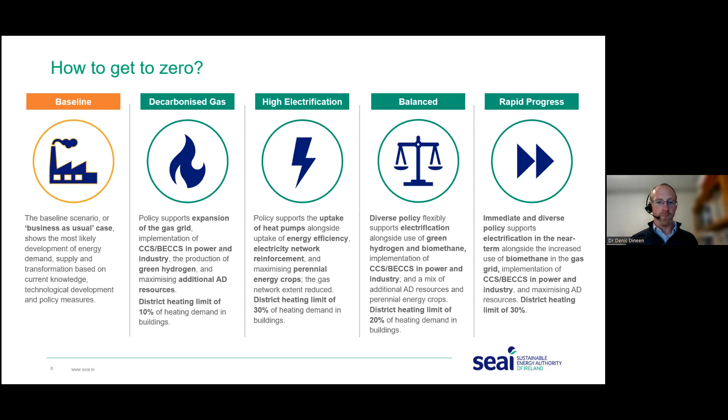So we'll look now at some of the key insights of the report. The first, and really this is just context rather than a finding of the modeling as such, is that we're not starting from a good place. Heat is responsible for a quarter of all greenhouse gas emissions - so it's not just energy, that's including agriculture - and it's just under 40% of energy-related CO2 emissions. As Barry mentioned at the start, it's a really big chunk of the overall piece.

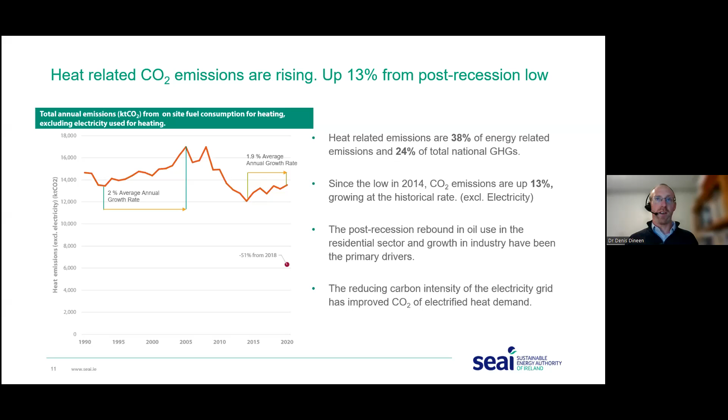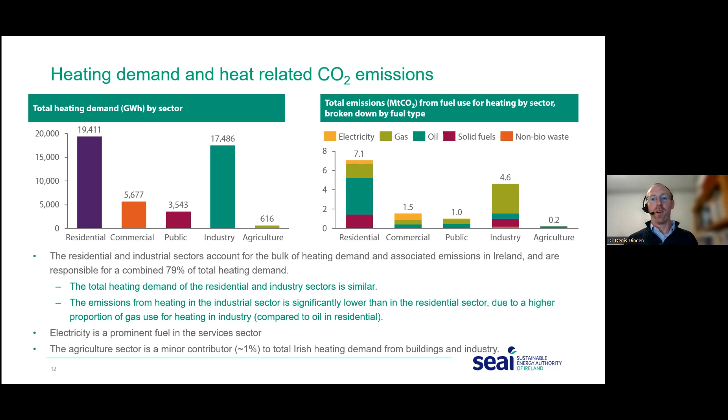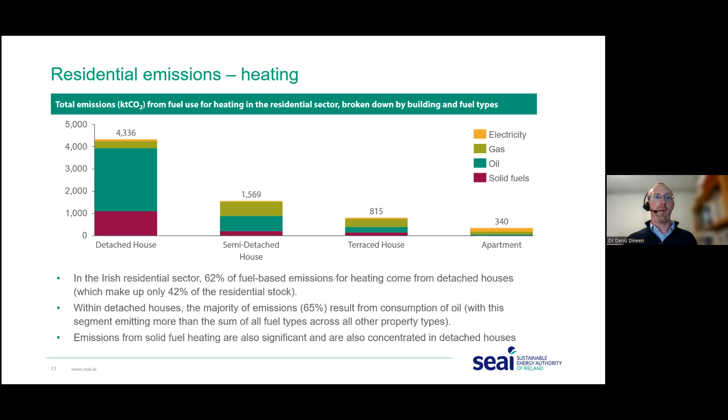But most of the other sectors, apart from those two, it's really kind of medium or low grade heat. Now, I suppose it's a relative term because, as I say, we would call our kind of high-medium grade heat there 150 to 500 degrees C. So a lot of industries in Ireland would consider 500 degrees C to be high temperature. But I guess on the international scale, when you have industries like steel production, it's generally over 500 that's called high grade heat in that context. So I guess it's a bit relative.

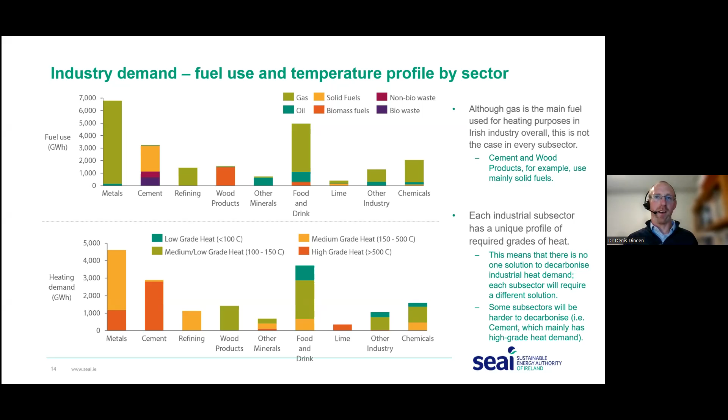run on solid fuels. So when we were looking at modeling the industrial sector, it was actually by these technology types that we characterized it rather than by sector or anything else, because it's these individual technologies, boilers, furnaces, that we need to look at for the direct, possible low carbon alternative replacements.

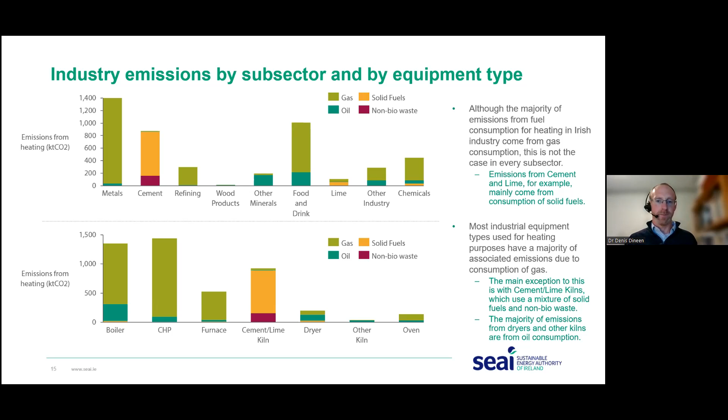Again, more kind of context. There's been more light shed on this in the meantime since the study, but still the overall goal is that Ireland aims to reduce its emissions by 51% from 2018 levels by 2030. So this is for all emissions, including agriculture. So energy will have a greater burden.

Now, there has been more detail provided since then on the actual sector emission ceilings, but I haven't updated these slides with those yet. But the statement still stands true that energy and heat will have to play a larger role than the level 51%. So there's no specific target for heat in the climate action plan. It kind of cuts across a number of different sectors, but

one of the findings of the report really is that, yes, the climate action plan targets that relate to heat will be very, very hard to achieve, and they're very ambitious, but even if we were to achieve them, that is unlikely to be enough for heat to meet a pro rata share of the required emissions cuts.

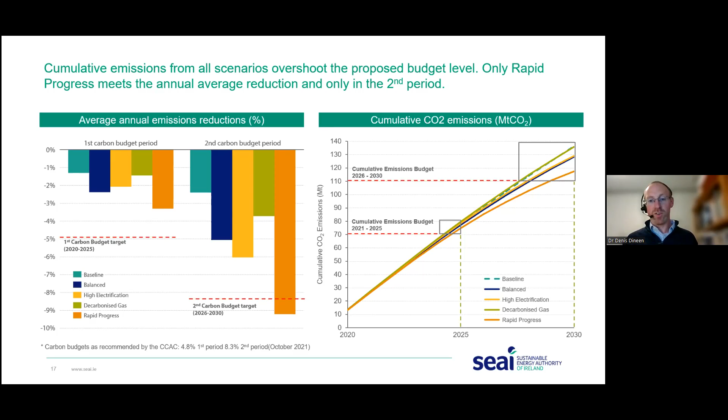So even then, the rapid progress scenario only comes within budget in the second budget period, and it still misses the cumulative 2030 target across the first 2 budget periods. So really, the finding there is that the modeling shows that an unprecedented level of additional policy effort that goes beyond the current heat-related targets in the CAP 21 is required if heat is to play a proportional share in meeting the carbon budget limits.

So the main focus of this study was, as I said, to explore key pathway options to get to net zero by 2050. So the scenarios with the lowest overall cumulative emissions, we found, are the ones that make use of the technologies that are commercially available today. So that's technologies like electrification and district heating.

And then the scenarios that wait for potentially promising technologies in the future, like maybe hydrogen, have higher cumulative emissions because effectively you have to wait longer to lower your emissions until those technologies become more mature. And again, that's the key finding of the report. And the reason is simple: the scenarios that rely on electrification decarbonize faster because those electrification technologies are available now.

And as I said, the decarbonized gas scenario, yes, it relies on biomethane in the short term, but there's a limited resource potential there of biomethane. So really it has to wait until hydrogen comes in at scale to allow more complete decarbonization of the heat system. And that requires waiting until the 2030s to decarbonize a large chunk of the system. And so that necessitates larger cumulative emissions.

Of course, the rapid progress scenario, the way it was designed, sees the lowest cumulative emissions of all the scenarios. And this, again, highlights the benefit of early action. But again, just to say that what we included in the rapid progress scenario was really unprecedented levels of policy effort.

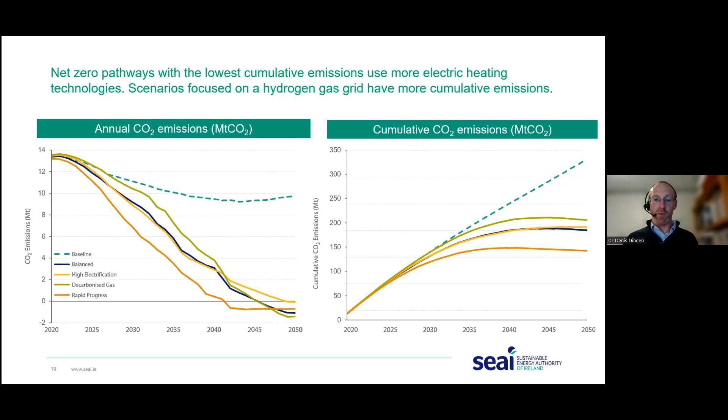So the study identified a set of key actions that we recommended that policymakers can act on now to deliver emissions cuts. So in this section, we'll go through some of those and outline the evidence that we found to support them.

So the first finding that we had was that district heating offers significant additional potential, that it's a proven mature technology and that it's available now. So again, this is speaking to the necessity to really leverage and lean on the technologies that are available now as much as is possible. So we invested a lot of effort in just understanding the potential of district heating, and we find significant additional potential compared to previous estimates.

And this was down to a more detailed analysis of how the costs of rolling out district heating scale with heat density. So previous work carried out by ourselves would have indicated that district heating networks weren't really viable unless the heat density exceeded 10,000 megawatt hours per kilometer. But in this work, we were able to show that actually the capex of district heating begins to plateau once heat density exceeds even 1,000 megawatt hours per kilometer. And there's a big difference between those two.

So above that 10,000 megawatt hour per kilometer threshold is only 2.5% of all small areas. But above the 1,000 is something close to 50% of all small areas, or 50% of all building heat demand also. So there's a really big difference, and that's really the main reason for this finding that district heating could potentially play a much larger role than was previously thought.

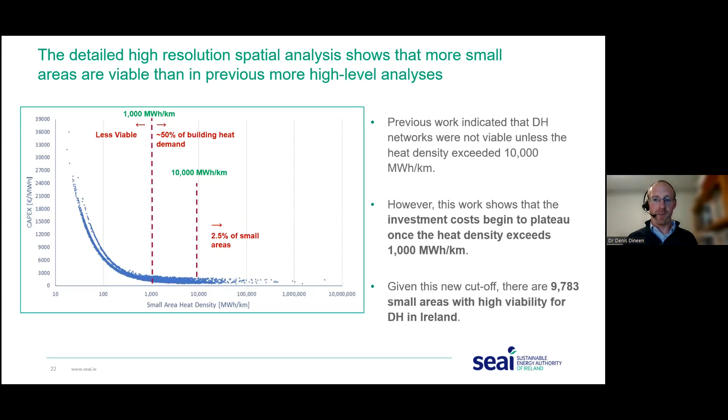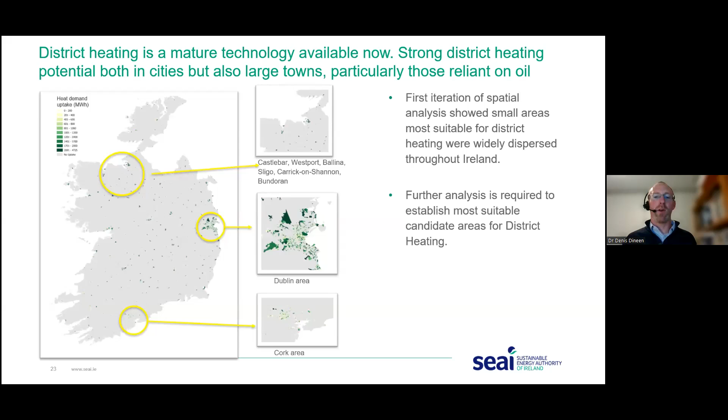So this map illustrates the results of the modeling at the time of the publication of the heat study. So you could say it was sort of a first iteration of a spatial analysis. And what it showed was that the small areas that were most suitable for district heating were really widely dispersed throughout Ireland. But we were clear from the start that further, more detailed analysis is required to establish the most suitable candidate areas for district heating.

And we've already made a start on some of that more detailed spatial analysis since the publication of the heat study. So we haven't published it yet, but you can see here just a screenshot of the type of outputs of the work we've been looking at. So the chart here shows the heat density for commercial and public sector heat demand for Louth. And looking at those sectors reflects the importance that these sectors have to act as anchor loads for prospective district heating schemes.

So even this is still a high level analysis really, and it's intended that this work will lead to identification of more areas for more detailed site specific feasibility studies that will really start pointing to the actual feasibility of this range of locations for rolling out district heating to hit our ambitious district heating targets.

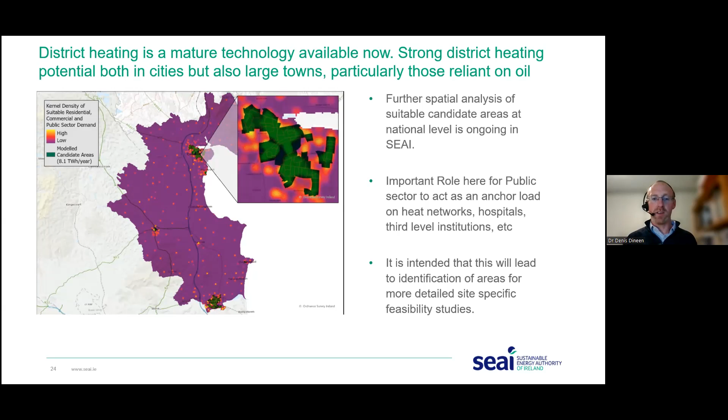So looking at what energy sources were used in the model for district heat, in all scenarios, we see a prominent role for both air source and ground source heat pumps, and also potential for biomass. Now, there's a couple of caveats to say here, I guess. We were conservative in our approach to heat sources, and we definitely had some data limitations, particularly in relation to waste heat. So we would expect that with better data, we would see more waste heat coming into the model, but it was a limitation on the modeling there really.

So we were keen to emphasize that there is, as I say, more potential for low cost heat sources that were outside of the scope of the study also. For instance, any potential new power stations should be made ready for heat extraction that could potentially feed into district heating systems. And also outside of the scope, because there just wasn't sufficient data at the time of the study, was the potential for deep geothermal heat sources. And the GSI are investigating and doing background work now that's showing that there could be large potential for geothermal for heating and heat storage.

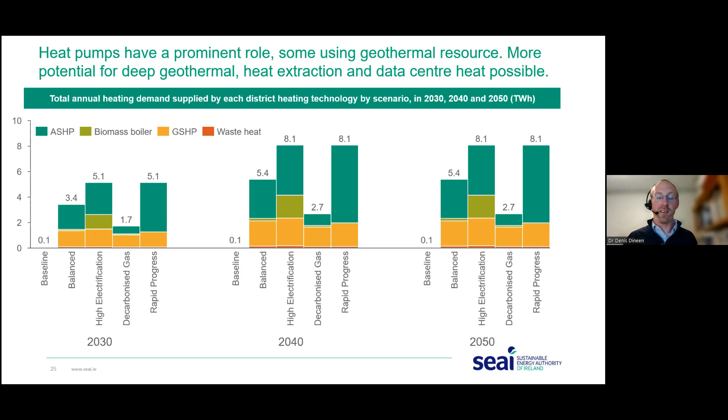So I guess probably the bigger question is, why do we not already have district heating? Many countries across Europe do, and it's a very mature and very successful technology. So it's clear there's not technological barriers. Really, the barriers there are in terms of regulatory, planning, financing.

So since the publication of the study, a number of multi-department, multi-agency working groups were established, and they're looking to identify the necessary steps and the likely barriers to rolling out district heating and to propose solutions to those. So those working groups are currently working on that.

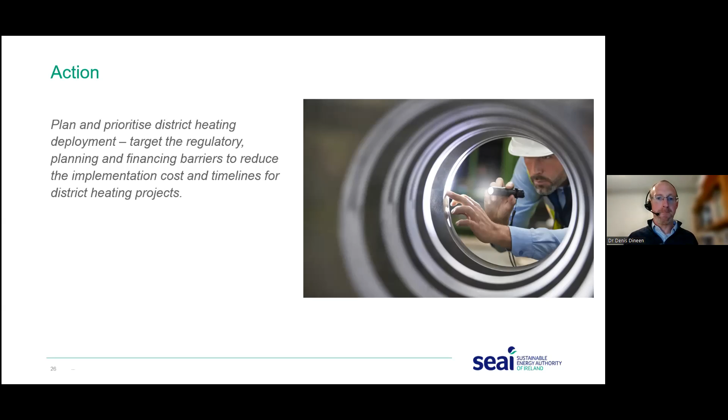So another finding of the study was that heat pumps are a very important technology in all scenarios and in all sectors. And they are technically suitable for many building types and even for some industrial processes. So the modeling that we did on this considered a range of factors relevant to their deployment, such as the least cost combination of fabric upgrades to allow the efficient operation of heat pumps, the impact on the electricity network of all the extra electricity demand from large scale electrification of heat demand, and also the performance and the sizing of heat pumps in some more poorly insulated buildings.

So the graph here shows the different scenarios that we ran and the heat pump penetration across time period. And really the main point is that they're prominent in all the scenarios. We can see that they mostly come through in the residential sector, which is probably very intuitive. And here they're replacing a lot of those oil boilers that we saw were a really big part of the CO2 emissions from the heat sector. Also in industry, we see some boilers being replaced by high temperature heat pumps.

And also in the services sector, there's a strong uptake of heat pumps in all scenarios, interestingly, including the baseline scenario. So this suggests that potentially there's already economic options there for the services sector to switch to heat pumps, and maybe it's some non-financial barriers that are actually limiting the potential growth in the services sector.

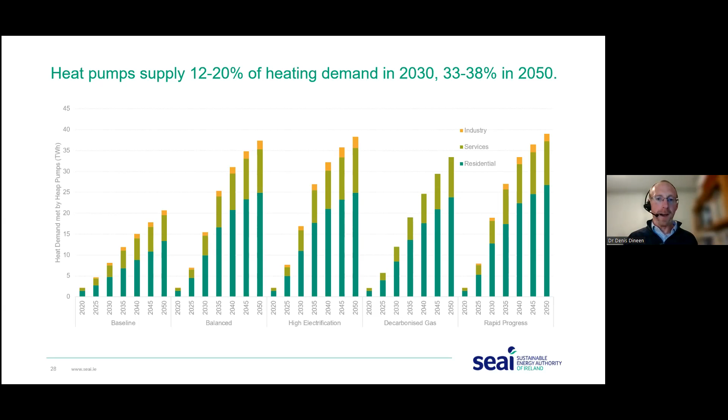So the finding here of the study is that really the aim of the game is to remove fossil fuels as quickly as possible. So we recommend evolving existing policy supports to focus on the replacement of fossil fuels in buildings rather than just a purely fabric first or efficiency first approach. So we want to make it practical and attractive for consumers to switch from their fossil fuel heating systems to low carbon alternatives.

And as the next few slides will show, from a consumer's perspective, expensive fabric upgrades are going to be hard to push for a very large number of people in the population. And really we need to start looking at energy efficiency measures as an enabler of low carbon technologies rather than as an end in itself.

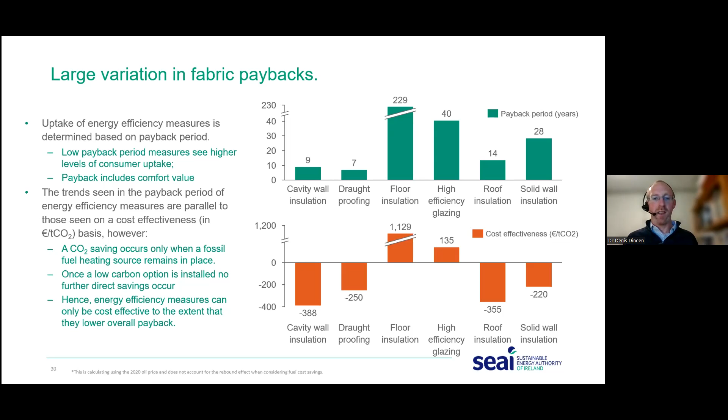But it's worth pointing out that to get this level of uptake in this scenario, we had to model very significant incentives, including grants of up to maybe 80% in some cases to drive this level of uptake of energy efficiency measures. So the finding is that it's really going to be hard to drive large levels of deep retrofit, even with significant grant supports.

Another key finding is that despite this significant push for energy efficiency in the decarbonisation scenarios, final residential sector energy demand in those scenarios is not actually much less than in the baseline scenario that doesn't have as much of a push for energy efficiency. Basically, new build dwellings and rebound effects after energy efficiency measures outpace the savings delivered, and demand actually increases in all the scenarios.

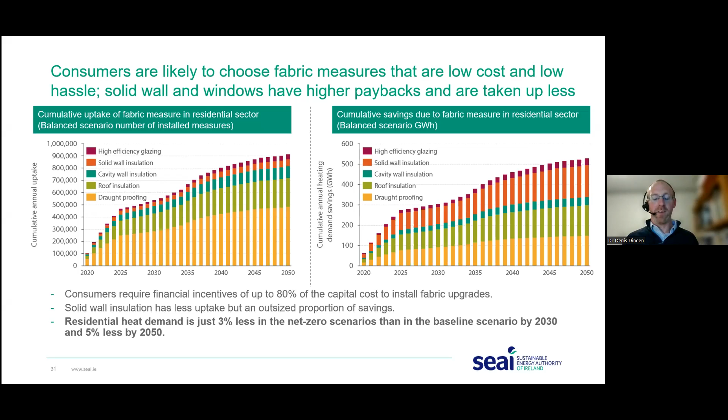So efficiency alone isn't going to get us to reduce emissions significantly. It's really only by replacing fossil fuel heating systems with low carbon alternatives that we're going to deliver significant reductions.

But the crucial interdependency here is that one of the main low carbon alternatives we have is heat pumps, and the efficiency and cost effectiveness of heat pumps depends on the thermal performance of the dwelling in the first place. Because of this, current heat pump grants have minimum eligibility criteria based on the heat loss indicator of the dwelling, designed to protect consumers.

But the really important question is, what is the minimum efficiency level required for the cost-effective deployment of a heat pump to protect those consumers? And once a house is at that minimum level of thermal performance where it's cost-effective for occupants to run a heat pump, it's crucial that they're incentivized to switch to a heat pump as soon as possible.

If at that point there's an investment choice between doing additional energy efficiency to get your home right down to maybe an A rating but keeping an oil boiler, or staying at that medium but still adequate thermal performance level and installing a heat pump, then from a decarbonisation perspective the overwhelming preference is that people install a heat pump rather than going to the nth degree on energy efficiency while keeping their oil or gas boiler.

So there's a new SEAI pilot scheme in the process of being launched that will support the installation of heat pumps in houses that currently fall outside the minimum performance criteria set for our grants, but where our initial analysis suggests it should still be cost effective for people in those houses to run a heat pump.

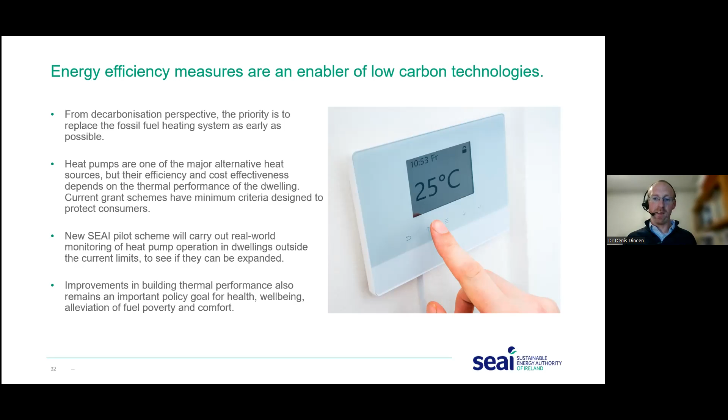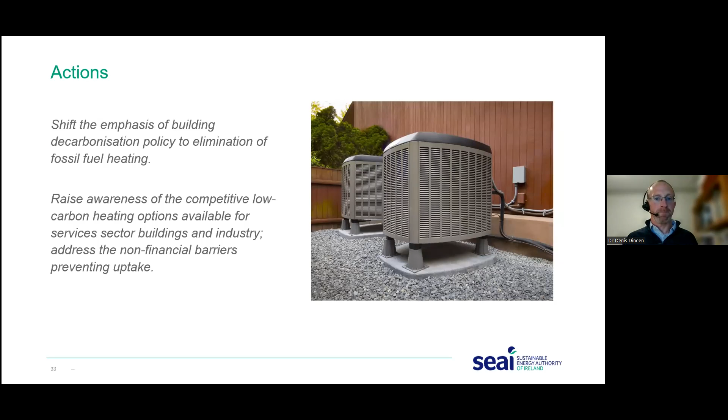The next main finding is around bioenergy. We find that available domestic solid and gaseous biomass fuels are used in all scenarios, and bioenergy meets a significant portion of heat demand in all scenarios—between about 7 and 17% of total heat demand supplied by bioenergy in 2030 and 2050.

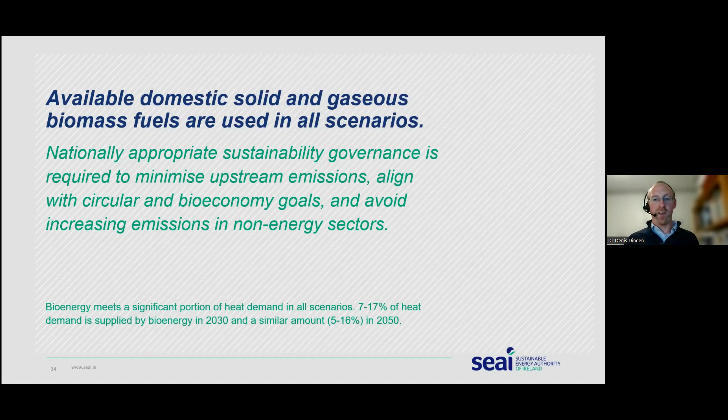So the study assumes very good practice in growing, harvesting, and using biomass fuels, and we acknowledge and highlight as a matter of concern that departing from best practice does risk increasing emissions in other sectors, particularly in the agriculture sector.

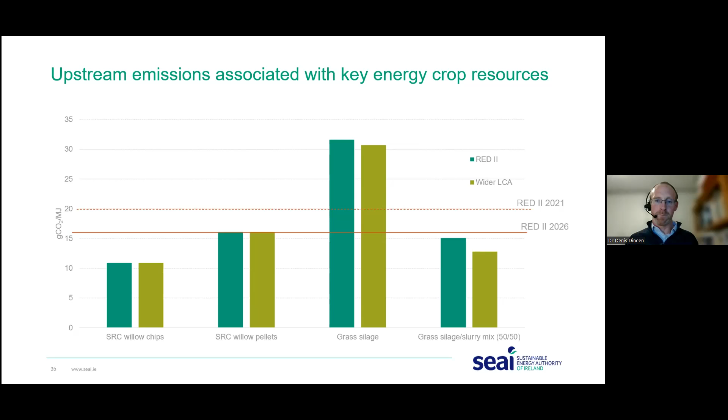There have been a number of resource assessments of biomethane in recent years that have shown a wide range of potential. This is generally down to differing views or assessments on the potential for grass silage. So as part of the heat study, we carried out a detailed spatial analysis of the potential for grass silage and animal slurry to evaluate the overall potential.

We find that it's more expensive than fossil gas used to be—again, things have moved on since the publication of the study, I guess—but it can be competitive with oil in off-gas grid applications, and can even be competitive with old gas prices if the costs and benefits are shared across all users.

But we do show significantly lower potential for biomethane than some previous studies, which we'll discuss in the following slides. The key reason for the lower estimate of biomethane is the constraints on the sustainable production of grass for anaerobic digestion.

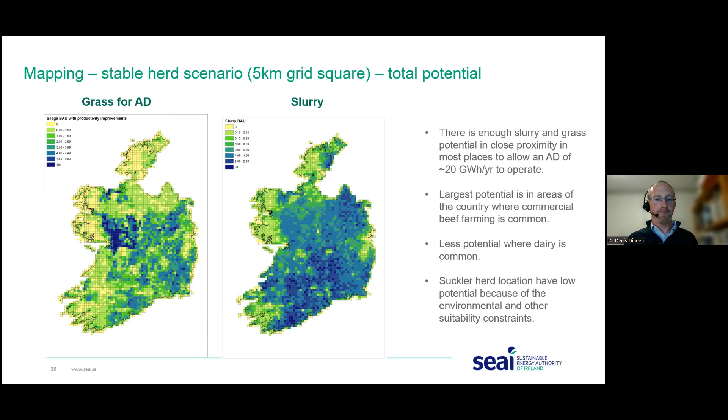Probably one of the important points is that direct transposition of EU legislation on sustainability will not alleviate the risks of using biomass at most sites in Ireland, because most sites in Ireland fall outside of the mandatory thresholds where sustainability governance applies. So we need more nationally appropriate sustainability governance that includes sites of the scale that we're likely to see in Ireland. That's another key finding of the study.

Long-term signals are important for consumers in their decision-making, particularly in the industrial sector. There are several technology options that require long-term central planning to deliver, and there are several interdependencies there.

That kind of leads us to a number of things that we need to start looking at—longer-term future decisions that we need to start actively making now. So one of the things in the study was looking at determining the future role of the gas grid.

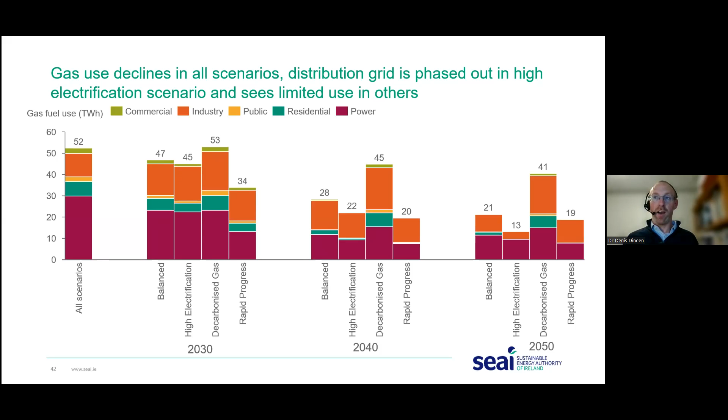So in all scenarios we see a reduction of gas use for electricity generation, reflecting the decarbonization of the electricity grid that'll have to happen. In the high electrification scenario, we also see the elimination of residential and public gas use, shown here in the yellow and green bars. This reflects a situation where the distribution grid is actually phased out, leaving a few large gas users connected directly to a transmission system - maybe large power plants using CCS potentially, and a few large high temperature heat industrial users.

Right now it's all fossil gas, but it's not going to be all fossil gas in the future. This chart shows the transition of the gas supply from the current situation on the left, where it's all fossil methane, to the right-hand side, where it's a combination of hydrogen and biomethane. There is some fossil gas, but it has to be combined with carbon capture and storage to meet our 2050 targets. One crucial point is that hydrogen doesn't show up in significant quantities until the mid-2030s and 2040s. It's worth noting that not all hydrogen is used for heat - this is total gas use, including power sector use of gas and hydrogen.

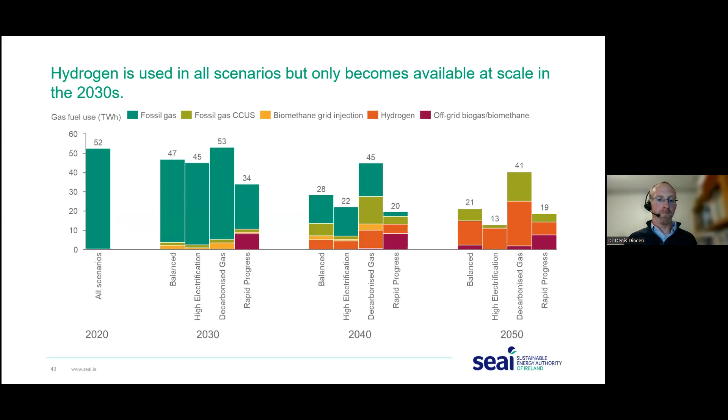Another thing worth noting about hydrogen is that our study finds it'll be expensive - more expensive than gas used to be, at least. Current gas prices are sort of very abnormal. And we find that it'll be as expensive as electricity.

This chart illustrates the range of different sources we examined for potentially providing green hydrogen. The biggest one, though there's a break in the time series, is floating offshore wind. At the end of the chart there's nearly 100 terawatt hours of potential - that's actually twice our current gas demand, in terms of producing hydrogen. So there may be significant export opportunities, as long as there's a market for it.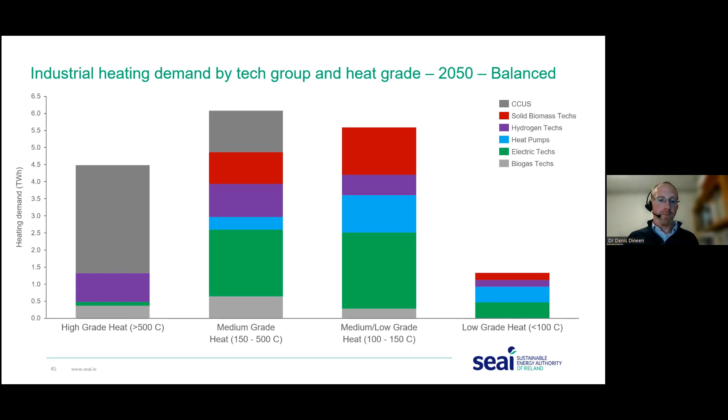Another really key question is when fossil fuels will be phased out. The model work we did suggested that without a fossil fuel phase out, there will be a significant amount of fossil fuel use right out to 2050, even under very high carbon price scenarios. So you do need, at some point in your timeline, to actually start banning fossil fuel use if you're going to get to net zero.

So for buildings, if you assume a 15-year technology life for a typical boiler, that implies that if you're interested in net zero by 2050, the latest date that you can ban fossil fuel technologies is 2035, giving 15 years for those to work out of the system. But as I said, when we looked at those scenarios, we found that none of them came close to meeting our 2030 targets. So if you're keeping within carbon budgets and focused on meeting the 2030 targets, you really need to pull forward those fossil fuel bans into the late 2020s.

And then, of course, for industry, tech life is probably more like 25 years than 15 years, and we didn't think it would be realistic to impose a ban that early on industrial technologies. But if we allow industry to install fossil fuel technologies out past 2030 or 2035, that implies that if you want to be net zero by 2050, you're going to have to look at early retirement of those technologies and writing off their value over a shorter time period.

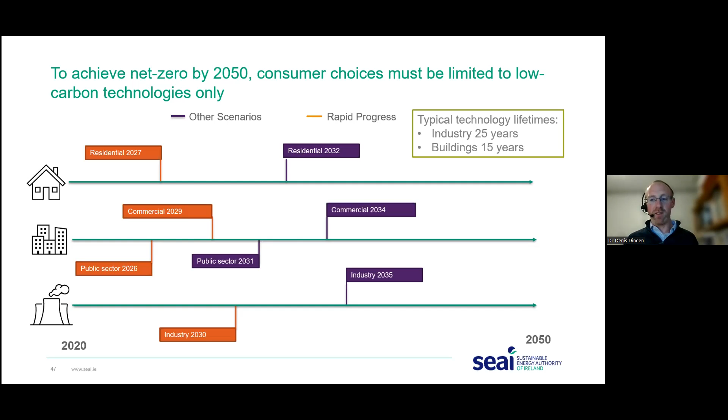So something we've been working on with policymakers since the publication of this study is to develop a policy statement on the need for clear timelines for fossil fuel phase out, and that work is ongoing.

So, coming to the end now, another key part of the picture we need to consider: the target for carbon neutrality by 2050 will require some form of negative emissions technology if we actually have to get down to zero.

So we did model a number of high and low deployment trajectories for CCS based on a detailed assessment of suitable sites in Ireland. At a minimum, industries with significant process emissions, like cement, will require CCS—that's about the only way to address those process emissions if you need to get down to absolute zero. At the upper end, we considered larger scale deployment of negative emission technologies to get down to zero, for example using bioenergy carbon capture and storage for electricity.

Really, it's just to make the point that it raises important questions. For example, there's a limited number of sites suitable in Ireland for bioenergy carbon capture and storage. So if we decide we actually need that level of negative emission technologies to get to zero, we need to start communicating that to those sites before they decide to invest in alternative decarbonisation options. We really need to start planning for it.

I think there's a sense that people talk about CCS as something that's 20 or 30 years away, but really, if we are going to rely on it before 2050, in the 2040s, we have to start actively planning for it now, start really seriously thinking about it. Where is it going to be? What are the sites that are going to use this technology? We need to start taking it seriously and take a really integrated, balanced approach to how we're going to plan for it.

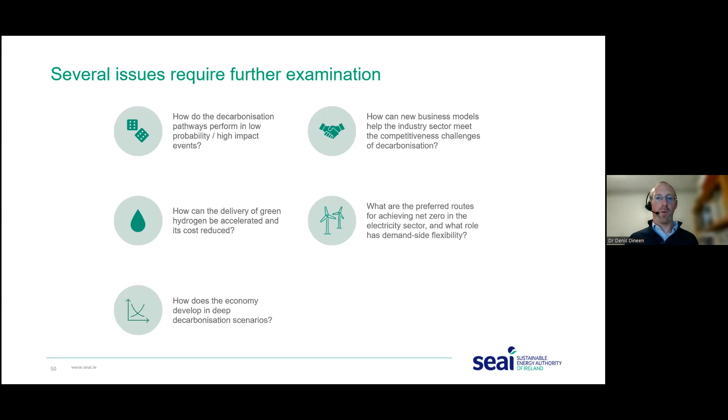So of course, there are several things that require further work. The study doesn't answer everything, so we've highlighted a number of areas that are priorities for further analysis. For example, how do the different scenarios we developed perform in stress events like high impact weather events—a Beast from the East, for instance? Does a decarbonized gas scenario perform better than an electrification scenario in that situation? How does the industry sector develop in potentially an era of higher fuel costs? There's much further work and more detailed questions and analysis to be done across a whole range of areas.